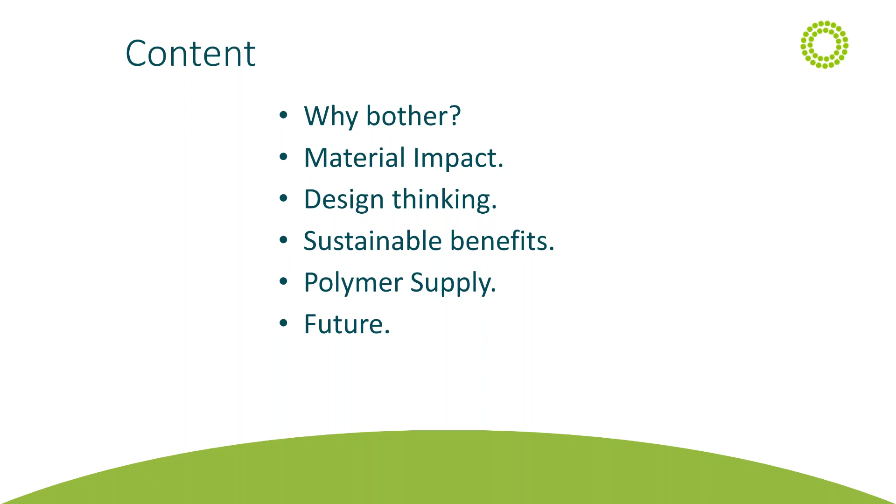Anyway, on to the presentation. First of all, I'll just reference why even bother with all this crazy recycling stuff? Why don't we just carry on doing what we've always done? Talk a bit about the impacts of materials and the way they influence design thinking, and then move on to what the benefits are for designers and specifiers of materials for using recycled content, and then a bit about where you might go and what you would need to look at if you're seeking polymer supply from the recycled marketplace, and then allow myself a few moments to do some future gazing.

First of all, I need to really reference what we do here at Axion Polymers. Today I'm speaking from our Manchester plant. So to set the context, it's really useful for me to explain a little bit about what we do, and then you'll understand where the basis of our knowledge and know-how has come from.

My company's vision is working towards a world where nothing goes to waste. Clearly that's a fair way off in the future, but on a simple commercial basis, if in my business there was nothing going out as waste and I could convert all the incoming materials into saleable products, I would have a much more valuable business.

My company, Axion Recycling Limited, has two sections to it: a consultancy business, which has been run since 2002, and also our Axion Polymers business, which is where we sort and separate materials. We've grown to, I think now we're about 97, 98 employees. So we've created high value jobs in the green economy. We're turning over a reasonable amount of cash, and we're making our contributions to the UK economy in wages and

employment, etc. At the moment, we can receive about 200,000 tons of input material, a material called auto shredder residue, which I'll talk about in more detail. Two plants here in Manchester. I'm sat in Trafford Park today, where we do the primary processing of metals and separating of the non-metallic materials. We have another plant in Salford where we then make finished polymer.

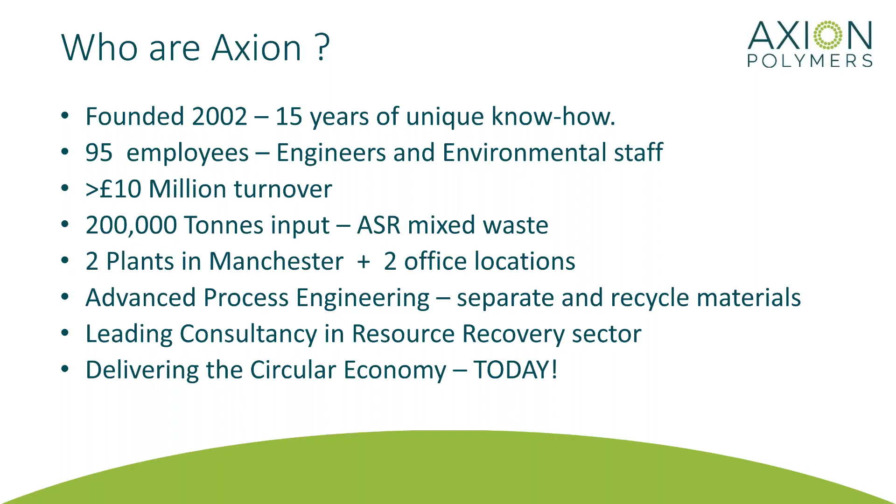And really, we're about advanced process engineering. We're chemical process engineers who just happen to see the waste in feed as our raw material. I think we're one of the leading consultants in the sector, and we're actually delivering the circular economy today. So I shall talk more about that.

This next slide is a familiar sight for anyone who spends time trying to drive around the UK, but all those motor cars in a traffic jam, I absolutely love it, because that's my future raw material stored in a metal box that's on 4 wheels on a big above ground warehouse that's being paid for by somebody else.

To give you a feel for what happens to motor vehicles when they reach end of life, this is a kind of model of the flow. The last owner, which is somebody who hasn't got a massive amount of cash, who ends up owning a 13-year-old vehicle, will normally ring up a local collection scheme.

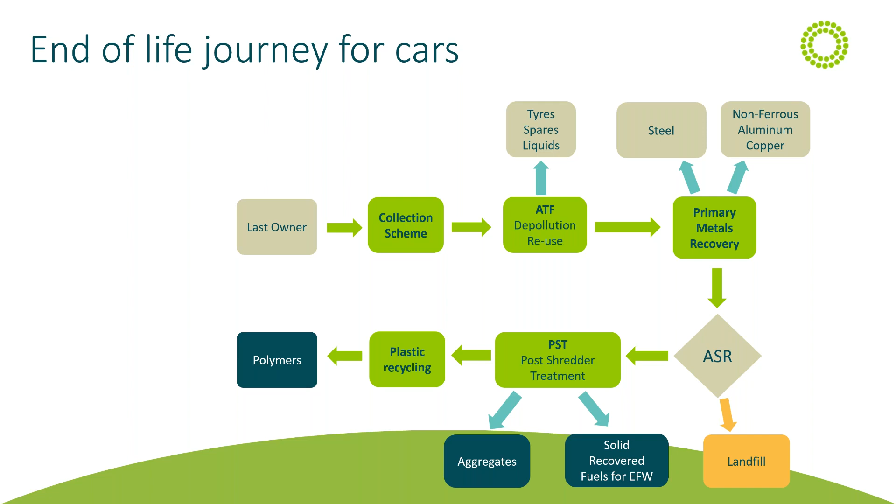We are linked closely with a company called Car Take Back, which does exactly what it says on the label. They'll come and take your car, give you some cash for whatever the weight is and the value of steel on that day, and they'll make sure that your name is removed from the logbook for the vehicle at DVLC Swansea. They depollute and remove liquids,

and then they pass the flattened vehicle onto a traditional metal recycler, who needs to be somebody who's got a big enough machine that can shred a whole car body up into little bits, and they'll get out the steel and the other big metals like aluminium. And that used to produce something called auto shredder residue, which traditionally went to landfill.

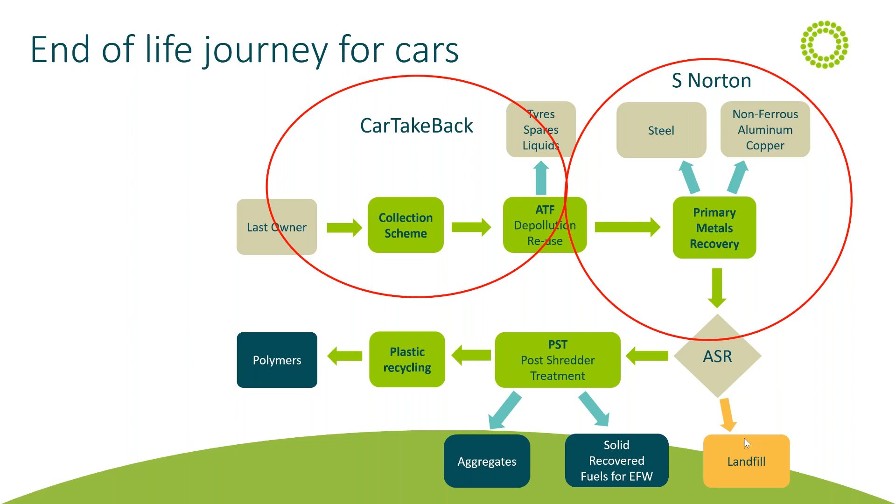But with landfill costs increasing dramatically like they have done in the last 10 years, everyone now is invested in PST, which is post-shredder treatment. And there the idea is to try and get anything out of this mixed non-metallic fraction that you can turn into useful stuff. So we get a stone and glass aggregate, solid recovered fuel, feedstock for our plastics recycling process,

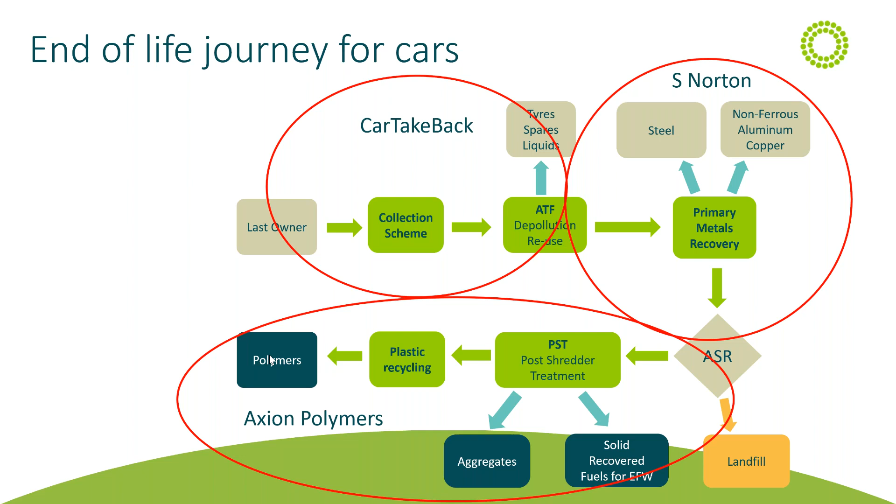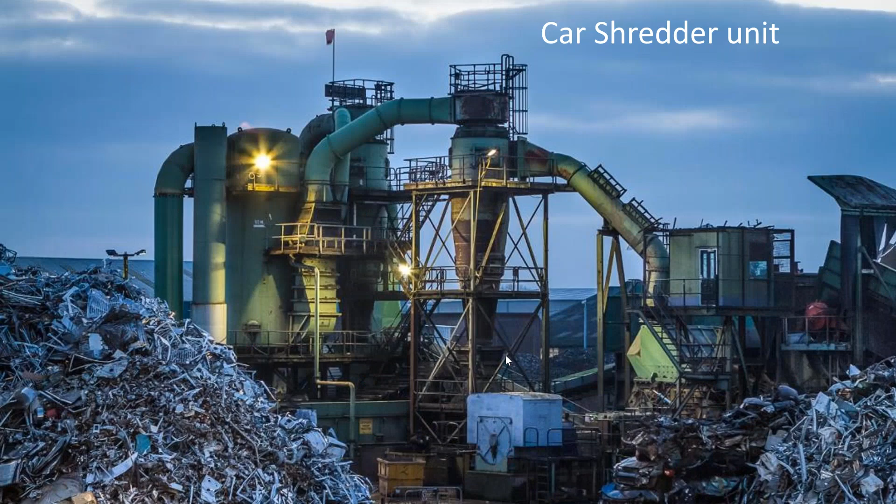This next slide shows a car shredding unit. The high stuff is a big air system that sucks away all the dust and dirt that's created when the shredding occurs down in the lower corner of the screen where the cars actually get shredded. There's a big drum magnet to pull off steel. There's a great big eddy current separator to pull off aluminium. And then everything else is auto shredder residue.

So ASR, as you can see by this next photo, is not a particularly attractive stuff, because if you think of all the things in a motor car which are not metallic, the seats, the carpets, the roof lining, the glass, the wood lining in the back of the door or under the boot, plus into a shredder lots of other things go in, like large domestic appliances, small mixed WEEE, generally collected scrap, building materials, etc. It makes shredder residue probably one of the most complicated mixed raw materials there is in the waste sector.

What's good about that is it's not that attractive to anybody else. So unless you spend a load of money and 15 years of your life learning how to sort and separate shredder residue, this stuff is really undesirable. So I don't have loads of people banging on my door every day saying, can we buy some of your shredder residue?

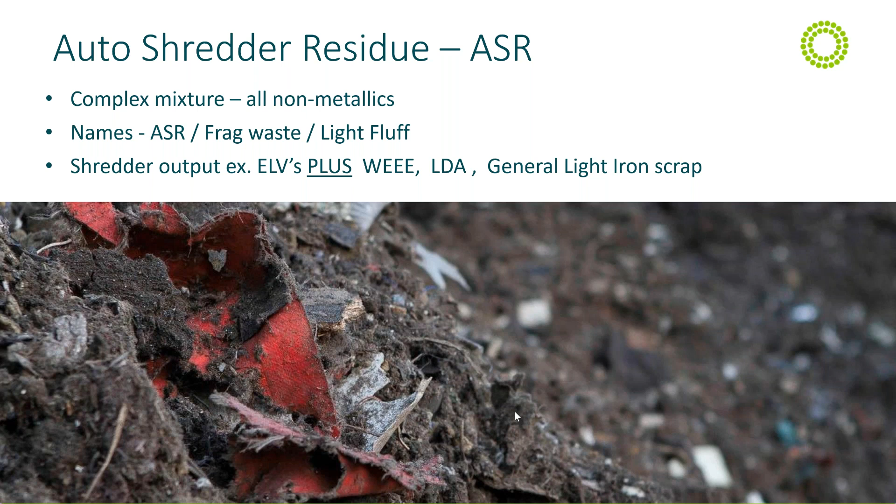The material gets fed into our SWAP plant, which is here in Trafford Park, Manchester, just about 50 metres from where I'm sitting in the office today. And that's the Shredder Waste Advanced Process Plant, which is the primary sorting and separation of that mixed ASR material. We built that in 2009, and we carry on improving and developing it as we go.

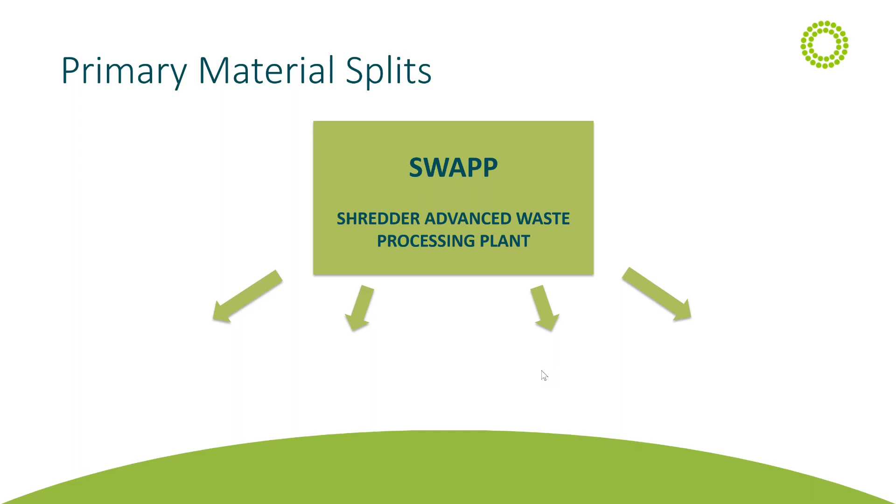And to make a complicated plant look very simple, here's the split of materials that we get. We get an alternative fuel, solid recovered fuel, which is the combustible fluffy fraction. We get aggregates and stone and glass for construction. We get copper, aluminium, a little bit of that out, and then a mixed plastics for upgrade.

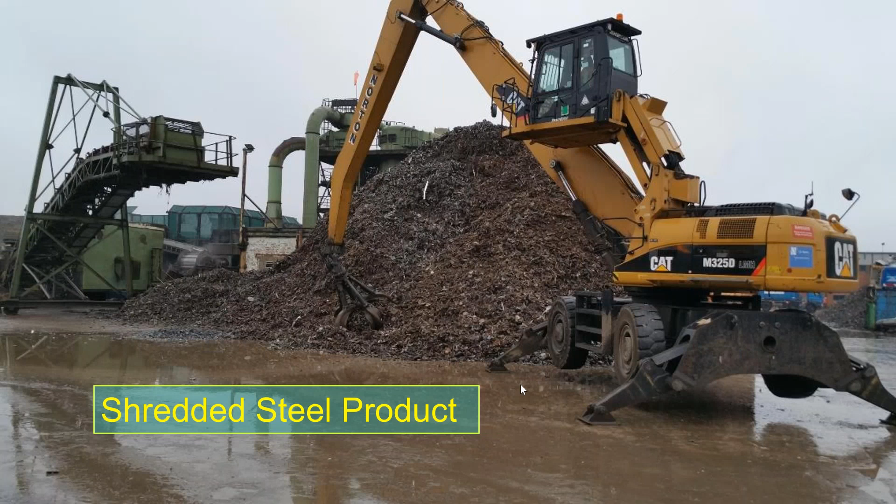Steel, you have to have a look at a picture of steel. I know it's not the prettiest picture in the world, but you have to remember that the steel is a large percentage of the infeed, and that was the original raison d'etre for the business. So the company I'm linked with, S. Norton, are big exporters of steel all over the world. They have docks in Liverpool where they can load 30,000 tons at a time. So steel is kind of the cash cow, big volume material.

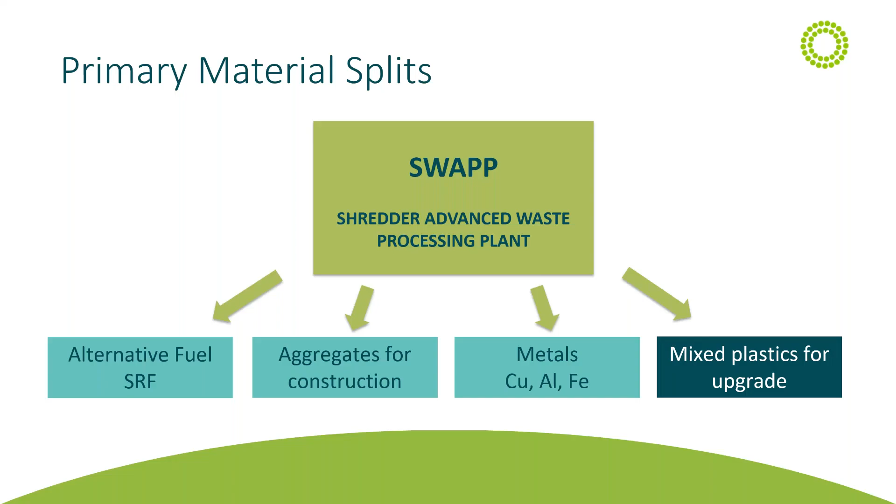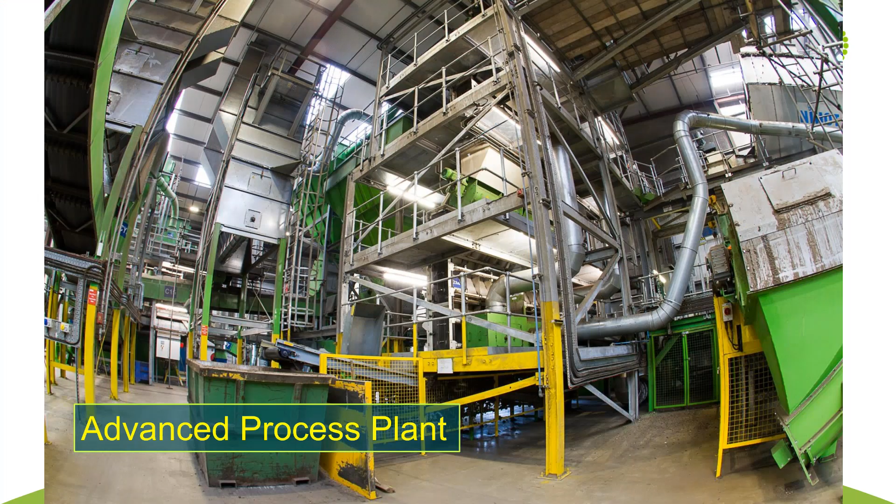And inside you can see the level of advanced process plant that we designed and built ourselves with our own engineers, because you simply can't go out and buy this stuff. It's all new, it's all leading edge, it's still pretty specialist. So designing it and building it, operating it and running it is what's given us the knowledge we've now got.

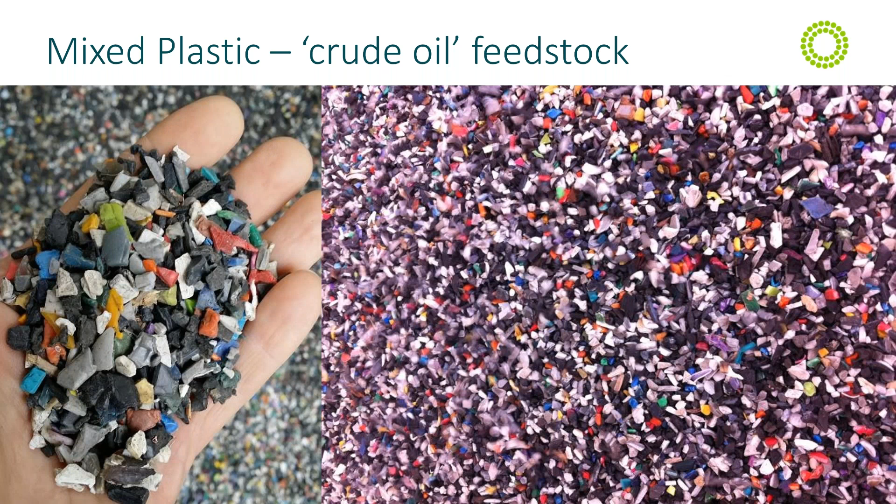We then get a lovely mixture of plastic that comes off the end of this SWAPP plant. And hopefully you're all amazed by the fact that this photograph is the material that we've extracted from that horrible looking ASR just 5 slides earlier. And in about half an hour, we've got what I would call an amazing transformation.

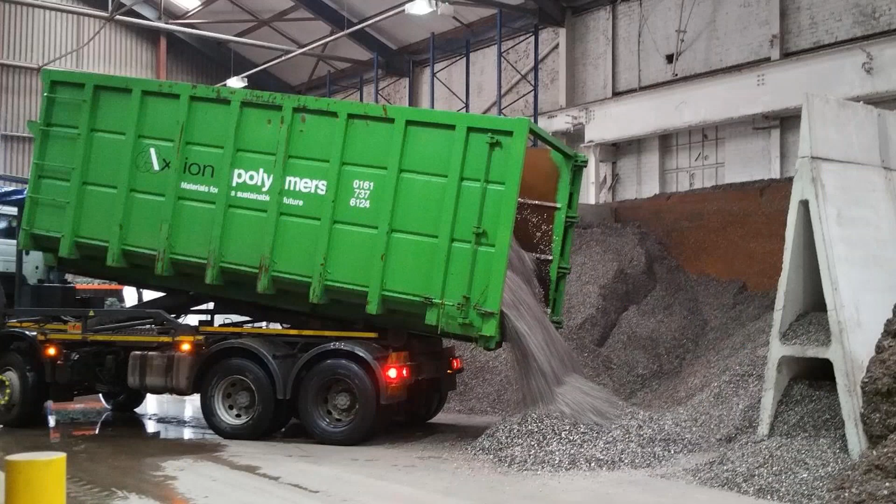This material is still all different types of plastic. You couldn't just stick that in an extruder, but as a kind of crude oil waiting to be further separated, it's really useful. And that gets delivered into our plant in Salford, which is only 5 miles away. And then that becomes their stable, steady, constant supply.

There's another 20 separation stages at Salford, which I can't explain to you because they're secret and it would take ages. But essentially, we use any basis for separation of the material that we can find: its size, its shape, its density, its color, its reaction to light, etc. And that lets us then get to a level of purity on the main polymers where we can make strand.

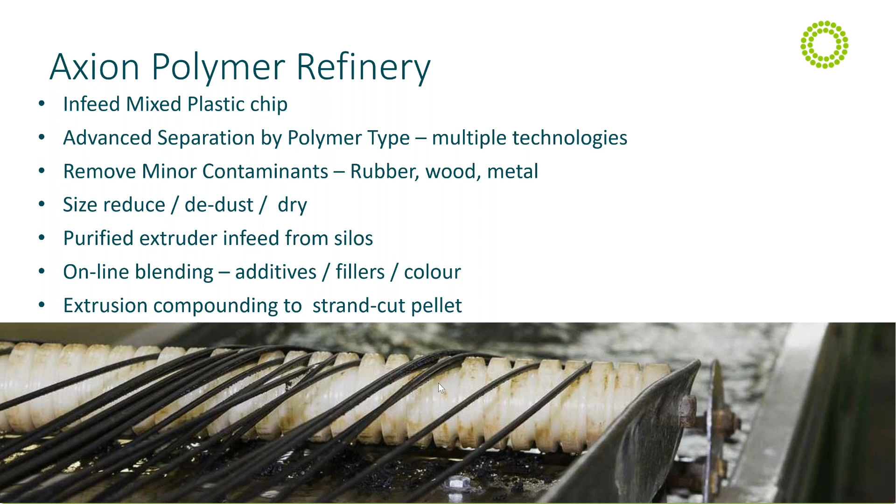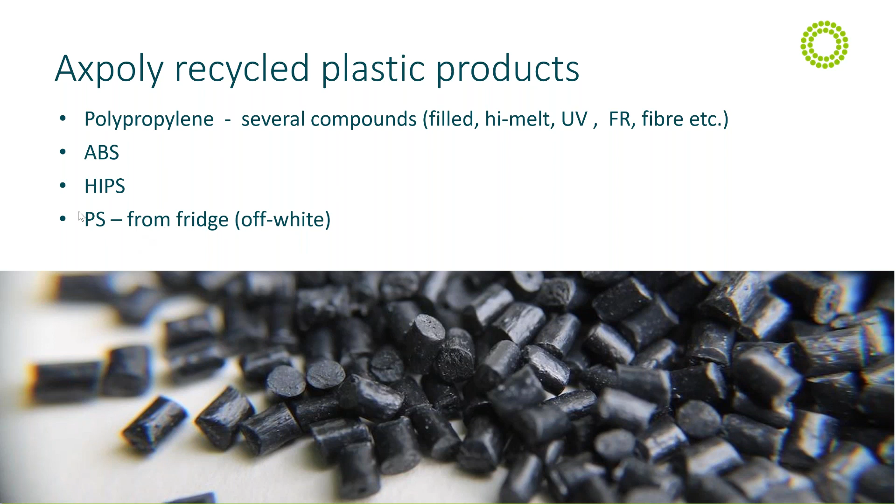Here's some strand being extruded, and then we chip that to pellet, and we're beginning to get near the end of waste. And we've then got polypropylene, ABS, and high impact polystyrene available. We still buy in some refrigerator flake. We don't have a fridge plant ourselves, and we make a light colored PS out of that. And then we've got a product.

So we can sell that to customers, and we're active in all these different markets. And as most of you will be familiar with the polymer market, you know that anything of any shape, any component, any product can nearly all be made out of plastic. So that's the background and the context about what we do.

But then I thought to myself, well, why bother? Why not just carry on using oil-based polymers that have come out of the ground and been refined by a big petrochem, and then they take those monomer gases, ethene, propene, butene, and turn them into polymers. That works. That's a big volume industry. And you don't have to be amazingly open-minded to realize that things are changing in the world.

One of the things I've developed as a habit is following the Arctic ice coverage in the north of the world, because the ice caps are a really important part of controlling the world's weather system. Normally the sun hits the ice and gets reflected, and there's a big lump of cold air that sits over the polar ice cap. To me, that sits there like a huge air conditioning system that tries to keep our world's weather pattern under some control, and the jet stream flows between the equator and bangs into the cold air of the ice cap and then moves up and down, and as we tilt towards the sun we get summer and winter.

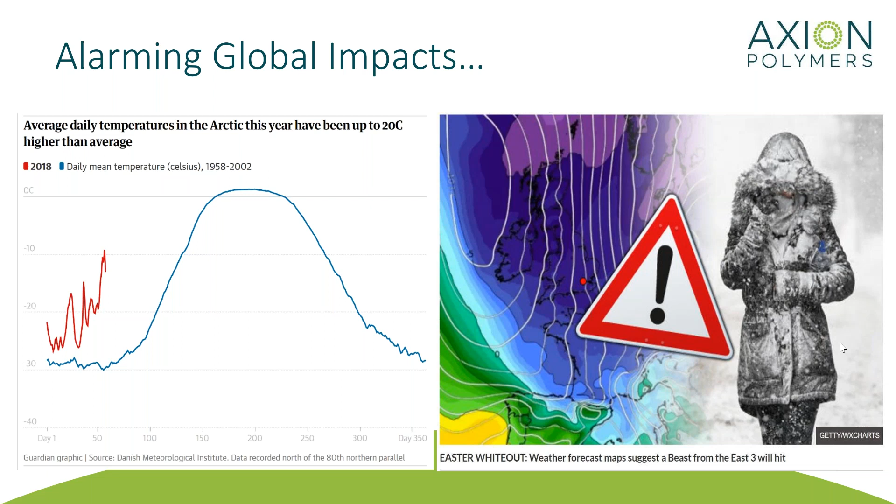What impact does that have? I took a photograph on the right, which is this beast from the east, a massive cold stream of air coming down, giving us unseasonal weather, and I'm told that at Easter we're going to have the same. So in terms of impact, burning fossil fuels and using fossil fuels to throw CO2 into the atmosphere is having a massive impact on everyone's lives.

And on the left, I've shown an example that I got from an academic meeting I went to at a university. And there's a kind of still probably theoretical world where raw materials flow into the circle and then they go round this lovely virtuous circle, and they either get turned into new products or redistributed, or we recycle all the materials. And you'll notice that on the left-hand diagram, there is no waste. We're a long way from that.

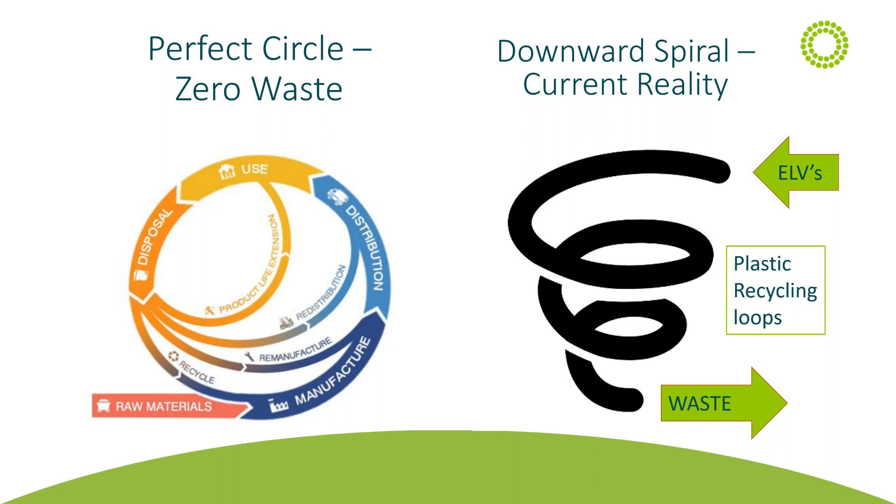I would accept that for metals, this is a much more closed up spiral where the material goes round and round and round. They're much closer to a non-waste model, but for plastics, we're still a long way from perfection. And I think the focus of this presentation and the ethos of my business is to try and accelerate a transition to a stage where we move more towards the theoretical future from where we are now.

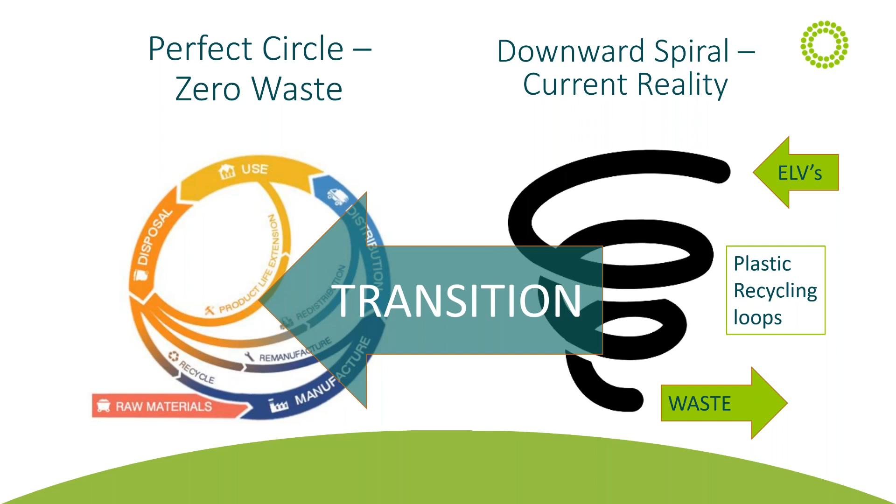We've shown that already, so I've doubled on my slides. Oh no, I'm going backwards, sorry. My mistake.

So, products, certainly automotive products, I'd call them materials hungry. You know, they weigh 1.3 tons on average. And the materials that go in products have a big impact. So, here's another example of my above ground warehouse. And we've really got millions and millions of motor vehicles, quite a lot of them pretty underutilized. They're either not going where they're supposed to be going at the speed they should, or they're blocking up the roads and the streets of our urban environment.

How much have we actually got of this stuff? You know, I tried to do some estimates here. The UK car pool, maybe 35 million vehicles. You've got to decide whether you include vans and coaches and lorries. Average weight, we know that's pretty accurate, about 1.3 tons. And the 250 kilo of plastics is all the polymers on a sort of modern compact vehicle.

And if you roll through the numbers on the lifetime, then there's a lot of debate about exactly how many cars arise as waste every year. I think it's about 1.7 million vehicles, even though the official destroyed figure is more like 1.1. And therefore, there's a massive amount of stuff sat in that big mine of vehicles waiting to be mined, and the annual arising is probably 450,000 tons of product. As plastic arisings, might be all mixed, might be complex.

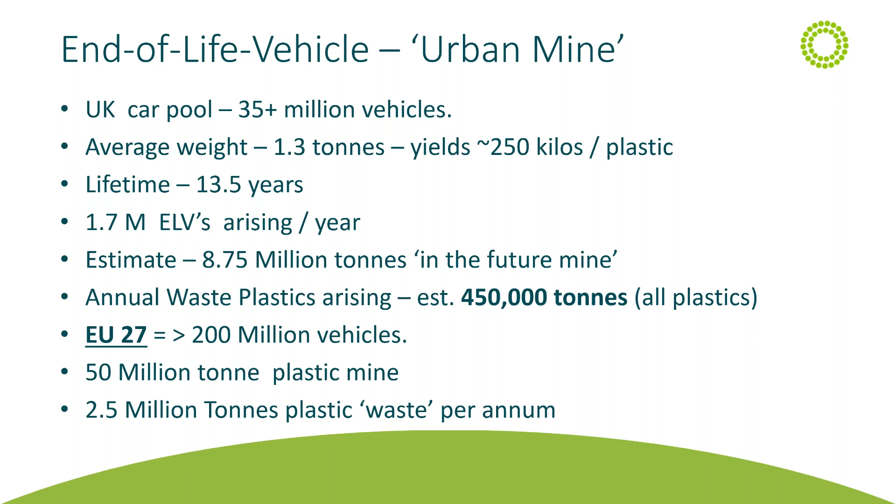Oh, sorry, I keep clicking my mouse the wrong way. Apologies.

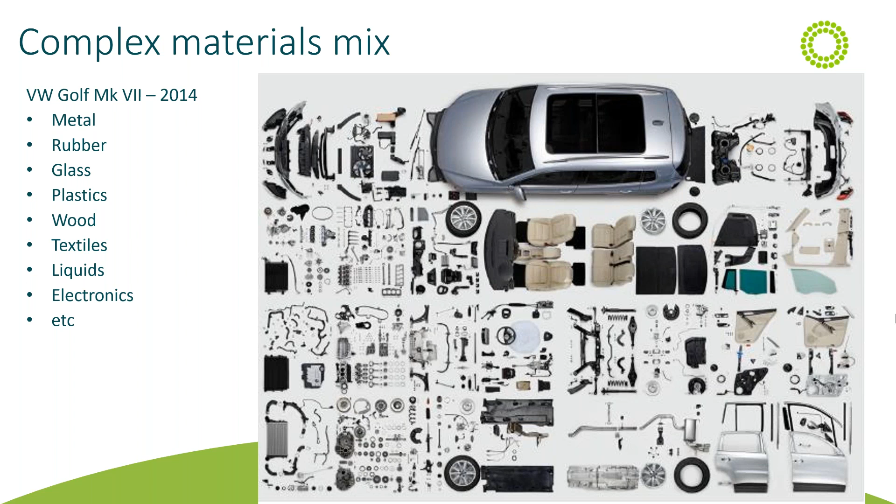It's complex. This is an explosion of all the parts. I can imagine the person who did this probably took all weekend in their garage and then laid all the parts out. It's pretty complex, but the mix of actual materials is very broad as well, and that's shown on the left: metals, rubber, glass, plastics, wood.

Putting that in a more ordered structure, about 70% of vehicles are metals, steel and aluminium, etc. And the plastics fraction is about 250 kilos. Depends what you call plastics, of course. If you roll in polyurethane foam, textiles, elastomers, and hard rigid plastics, then that includes the 250 kilos. But then there's all the composites and other complex things there. Even some of the glues and adhesives are probably elastomers.

And we have the thing in place called the ELV directive, which sets a high target for recycling and recovery of those materials. You can't hit that target if you just do the metals.

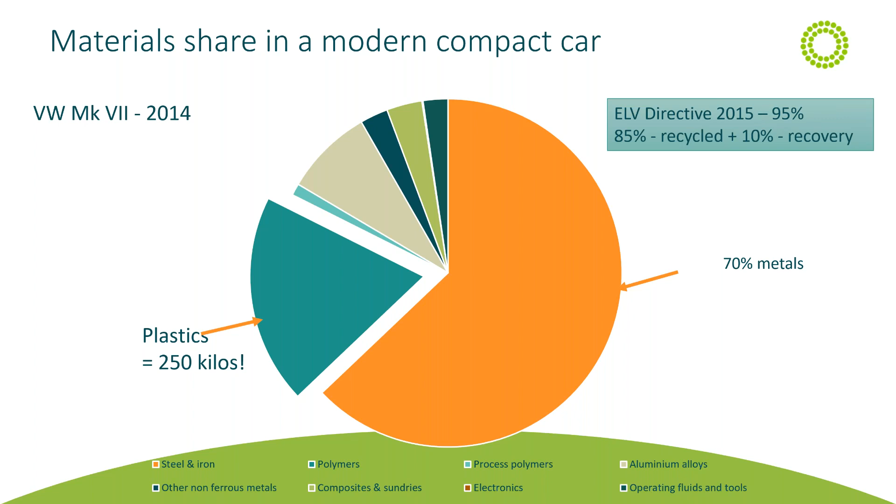But in the motor vehicle industry, times are changing. We will make a transition from internal combustion vehicles, which is shown on this example as the gasoline car, to electric vehicles in the next 5 or 10 years. And what this clever person in Holland did, the lady I've referred to down here, is looked at the life cycle impact of running an electric car versus a gasoline car.

Now, on the petrol car, all the focus is on the use phase because you're burning fossil fuels and emitting them out the exhaust. On the electric car, the big thing to consider is where did the electricity come from that you use to charge the vehicle? Now, there's two examples here. The top one shows what the mix of power generation was for Holland when this was done in about 2014. That will obviously become more renewable as they build more windmills, etc.

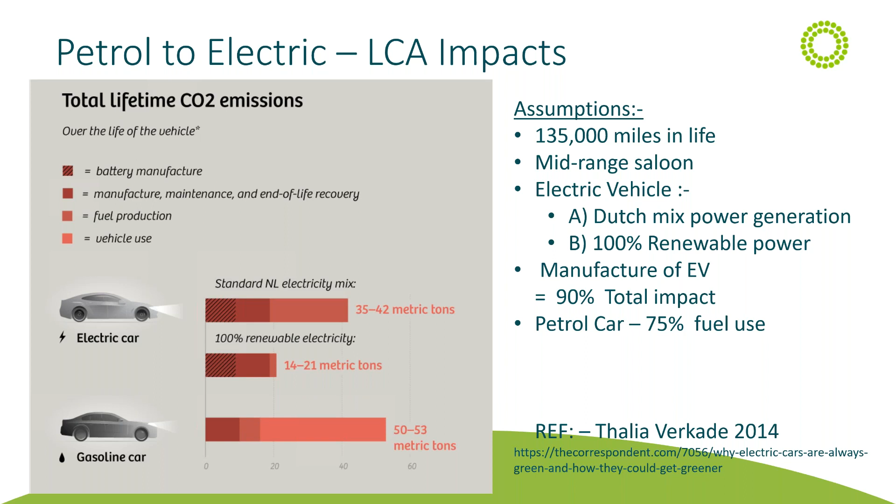But if you charge the car with 100% renewable power, then when you use that electricity, you're not really responsible for any emissions. So the only emission from driving an electric car charged with renewable power would be a little bit of rubber crumb off the tires, maybe. And at that point, the choice of materials and the manufacturing and putting those together is the entire impact of the car on the environment until, of course, it reaches end of life.

So what that means is the correct choice of material really, really matters, and that the duty and responsibility on people building cars is switching from the current main ethos, which is how can we get weight down and reduce emissions of fuel, over to what is the impact of the materials that I've chosen and how am I going to put them together so that when that product reaches end of life, I can get those materials back. If they're charged up with renewable energy, that part of it's done.

So what are the various impacts of the choices the designer makes when they want to build their lovely new shiny model that's going to sell loads? A new electric version of something like maybe the Nissan Leaf or the Volkswagen Golf. That's the big volume area. Certainly, I think it's clear that the decisions made at the design stage really live with the product for the whole of its life. So lightness, efficiency, the way you fit those together to make a really slippery shape, that has a huge impact on the life cycle impact of the product.

And when you select each material, you need to really think about the embedded carbon cost that came with that. I know that in the last few years, aluminium has been replacing steel to a large extent to get vehicle weights down, particularly on larger saloons. But the problem is you maybe get the weight down and make some savings on the in-use fuel emissions, but you bring with the aluminium, I think, about 10 times the carbon impact of buying steel, and steel is largely recycled. So there's a much more difficult quantified balance to be made when making those choices. And I really don't think that much of the design industry has switched onto this idea yet.

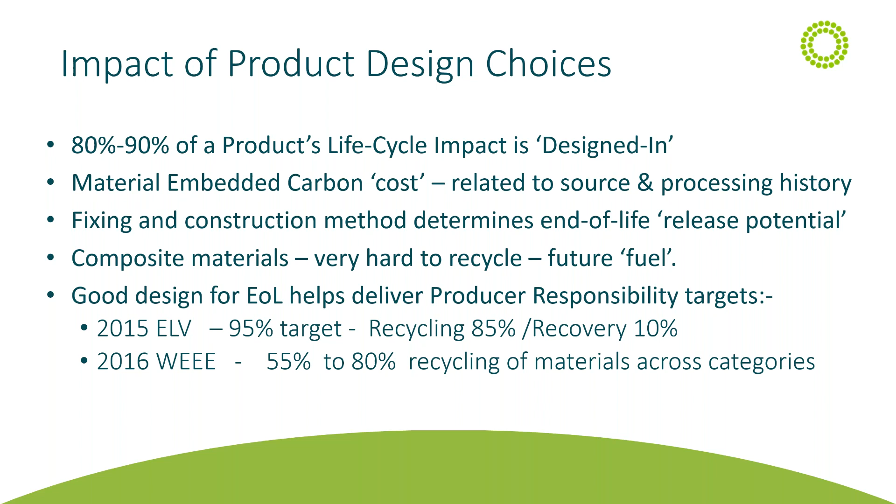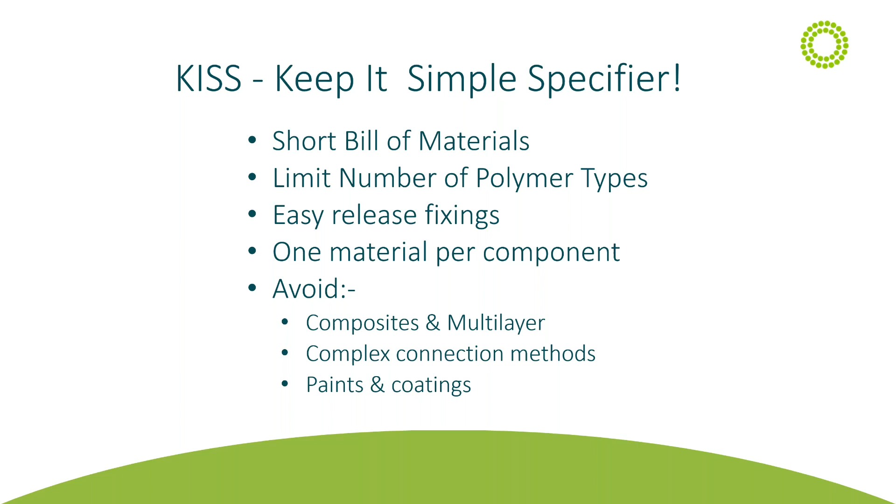but I can accept that there's loads of other things that influence the design, and I'm not saying we should all be driving around in this type of vehicle, but maybe when we don't own vehicles and we just dial up a 4-person pod to take me to the swimming pool with 2 children and family, I won't be so bothered about the aesthetic design of it. I just want the functional service performance, and then maybe the design criteria and rules will change.

So, what are the benefits of using these sustainable polymer materials? Because it's all well and good for me to come up with, let's make a transition to the circular economy, let's save the planet. You have to offer products which can compete with what's already out there.

And for me, some of the benefits are that nearly every leader of a well-known branded organization, particularly if they're making cars or washing machines or those material-hungry sectors, has stood up and said, not only are we going to be brand leader, not only are we going to deliver fantastic products, we are going to care for the planet, and we're going to be doing it in a sustainable way, and we're going to look at how green we can do this. And that goes in the annual company report.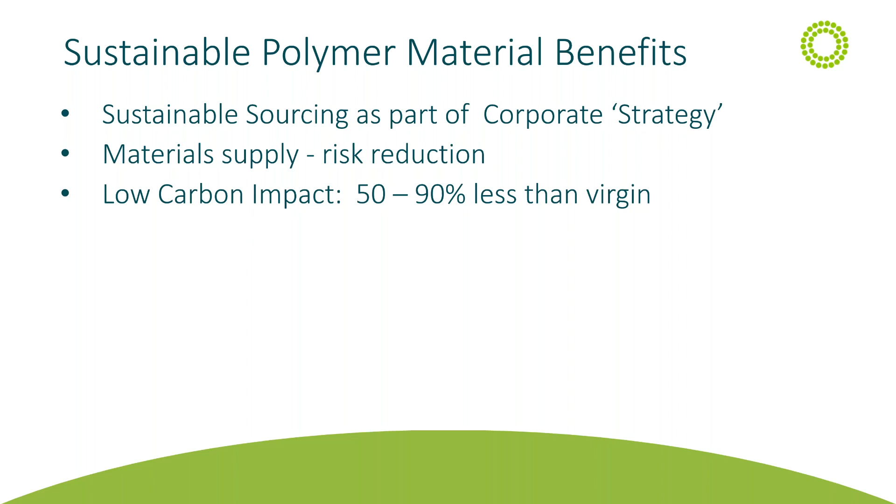Clearly, carbon impact is massive here, and I'll talk a bit more about that later, because that will become a metric in terms of judging materials in products. Cost savings, absolutely crucial, and very often we can give quite significant savings on recycled material versus virgin polymers.

Being insulated from oil price volatility is a difficult one to sell to people, because many purchasers are absolutely locked into the idea that all their polymer parts will move up and down in value following maybe Platts or ICIS. They fully expect you to ring them up in 6 months and say, oh, now that piece of 1 kilogram plastic has gone up by 50% because of force majeure at the polypropylene plant in Germany.

Well, if you own the whole waste capture and supply chain, you're completely isolated from all that horrible volatility and Platts and ICIS stuff, and I can just offer a customer a fixed price for the duration of the order that they give me.

I think as consumers become more interested in the impact of the products they buy, they're starting to ask more difficult questions. The educated, knowledgeable consumer thinks really hard about what it is that's embodied in the product they're buying. I spoke with a company the other day who started selling storage boxes on an internet site, and they noticed that on the internet, the customer takes a little bit more time because they maybe have to compare offer A and type B and C.

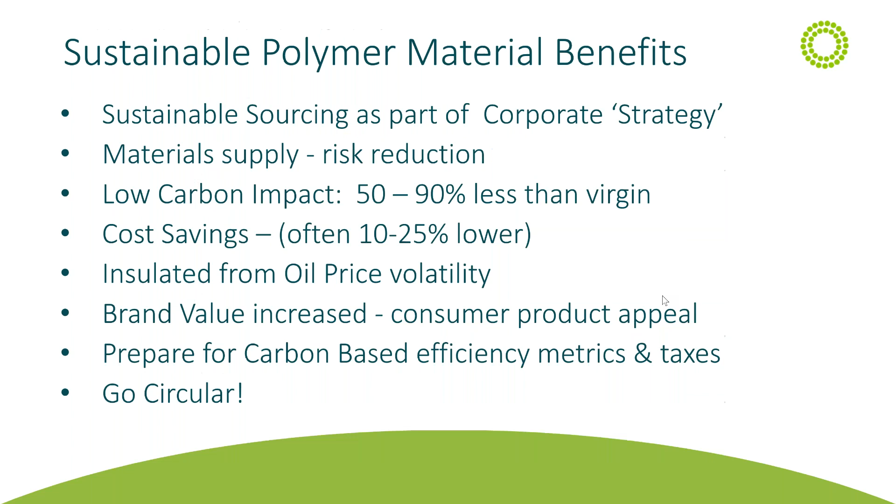kilogram produced. ABS has a much higher figure because you have to make 3 polymers, acrylonitrile, butadiene, styrene, and combine them together in a much more energy intensive reaction. So that gets a really high impact figure, and HIPS somewhere in the middle. And then these are the savings.

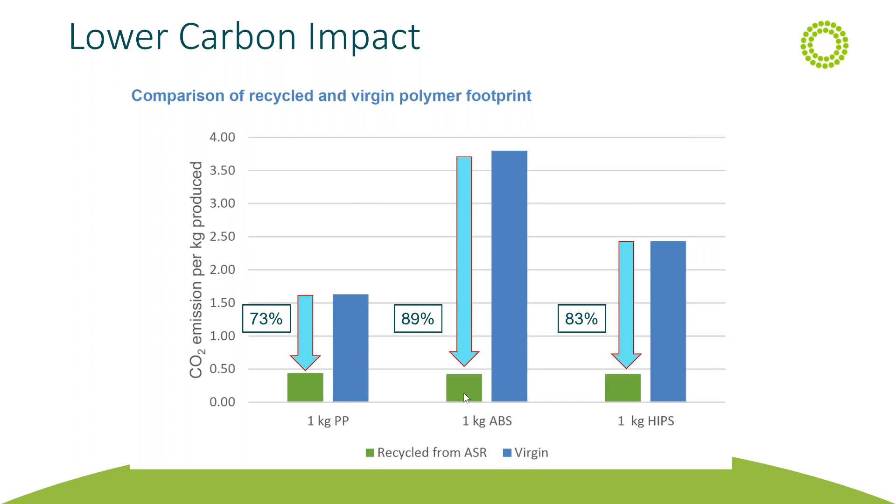They're absolutely vast. My green bars, which are done by the Carbon Trust system for analysing the system under my control on a like-for-like basis, the polymers are about the same because they're all mechanically recycled. So for ABS, the saving is absolutely huge, maybe 3.3, 3.4 tons of carbon emissions per ton of material. What does all that mean? Because I know that nobody walks around knowing what a CO2 equivalent is. So I've worked this through to this example.

Let's assume this lorry came last week and delivered 20 tons of virgin ABS polymer into my injection molding plant. And then I went in and I convinced the purchase manager to switch from his virgin ABS and go and buy some lovely Axpoly low carbon ABS. Delivering 20 tons yields a saving of 20 times the 3.4 kilograms of CO2. Great big number. Still doesn't mean much.

If the lorry then drove away from the factory and said, right, I'm going to keep driving this lorry, I'm going to count up the emissions impact of driving the lorry, because lorries do 8 miles per gallon of diesel. We can work out exactly how far the lorry will go if it used up all the savings that were achieved from just one 20-ton delivery. I'm putting a pause in so that you can all have a guess. And if you were in the audience now, I'd be asking people to guess.

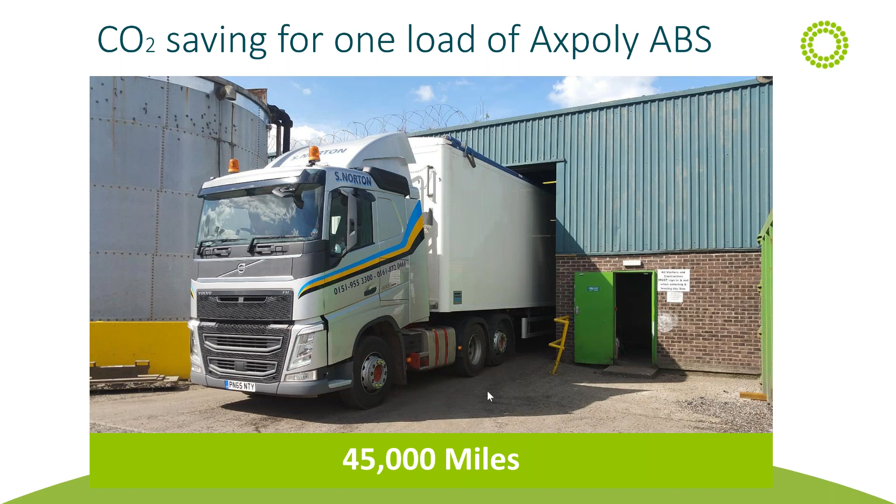But 45,000 miles, it's absolutely vast. That's what, 6 to 9 months operational time for one big road vehicle. So when these slightly ethereal CO2 equivalents get converted into pound note figures, the savings will be huge.

Right, nearly into the time. Last few slides. What should you look for if you're trying to select someone to give you some recycled material? If you're absolutely convinced that the massive amount of benefits are a convincing thing, where do you go? What should you look for? Because you're moving into a new field here. You're not going to super multinational oil and petrochemical businesses who've got huge, great plants all over the world. You're probably dealing with a smaller, local, entrepreneurial recycler type person.

So I would say that the things to really look for: where does the person get their feedstock? Is there some really reliable long-term urban mine that they're tapped into? If they're scrabbling around every week to buy a little bit of scrap from the nearest injection molding company, then I would steer miles away from that, because anyone who works as a parasite on industrial scrap is destined to disaster. Make sure that there's some sort of really integrated business model, that there's a degree of control and ownership all the way along the waste chain, from the origin of the waste and all the way through the material stewardship to start producing useful products. That will show a long-term investment, a secure supply. I call it going from the grave back to the cradle.

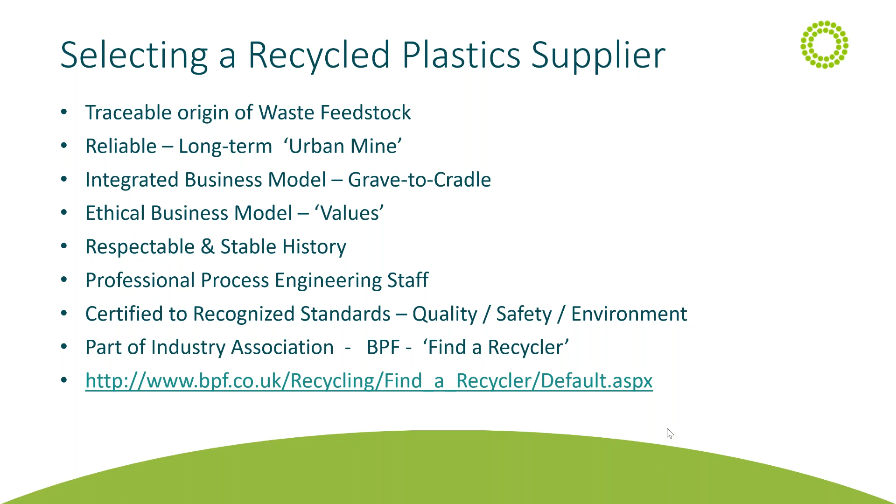We're nearly done. If I was in the audience, if you're there in the audience now, I'd be looking around the audience to see if anyone was nodding off a bit, and I might raise my voice, but as I can't do that, I'll assume that everyone is still wide awake, fully engaged with my talk.

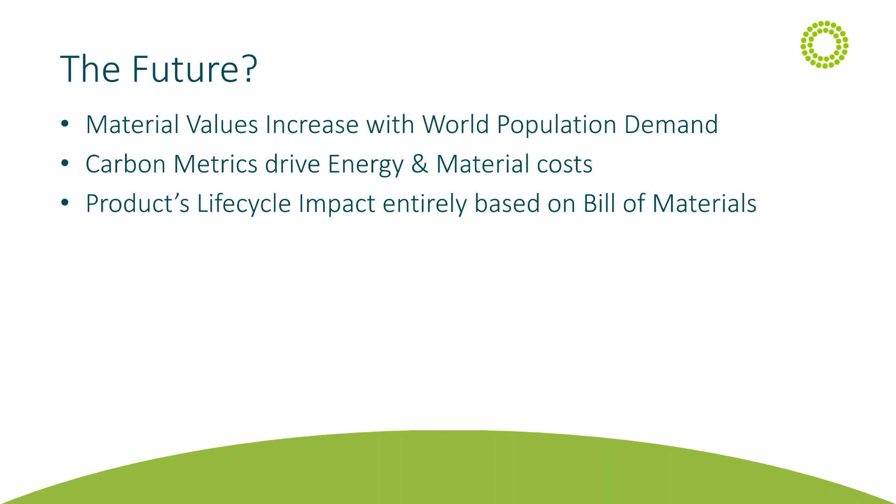I believe that some countries will begin to understand the importance of carbon metrics to drive both their waste recycling sector and also to measure and control the costs and choices made when energy and material hungry industries use up materials. And when that happens, when carbon equals pound notes, we will see some huge changes. We will get to a point where product life cycles, as I pointed out with my electric vehicle charged entirely on renewable electricity, are entirely based on the bill of materials and the choices at the design stage. I think we'll start to see better designed products, which are not just about aesthetics and sales and glossiness and techno-ness and, oh, isn't it appealing, isn't it lovely, isn't it pretty? Materials that actually really think about how they're going to be yielded and extracted at the end of life.

I think we'll see more business models where organizations who own the materials when they built the product will want to own that material when it becomes available at end of life. It's already happening in things like motive power batteries for cars, where there's loads of cadmium, lithium, lead in the battery, and they're really expensive. It makes sense for the owners of those materials to get those big lumps of valuable materials back. And we'll see that business model come in a lot more.

I think we'll start to see integration between manufacturers and the recycling sector. And we've already seen that in some areas where manufacturing businesses have taken over recyclers to gain the know-how, the knowledge, that kind of entrepreneurial zeal that makes them do really amazing things. And then, of course, that will start to drive the design itself. If manufacturers had to take apart the products they'd made a few years before, they would think a lot more

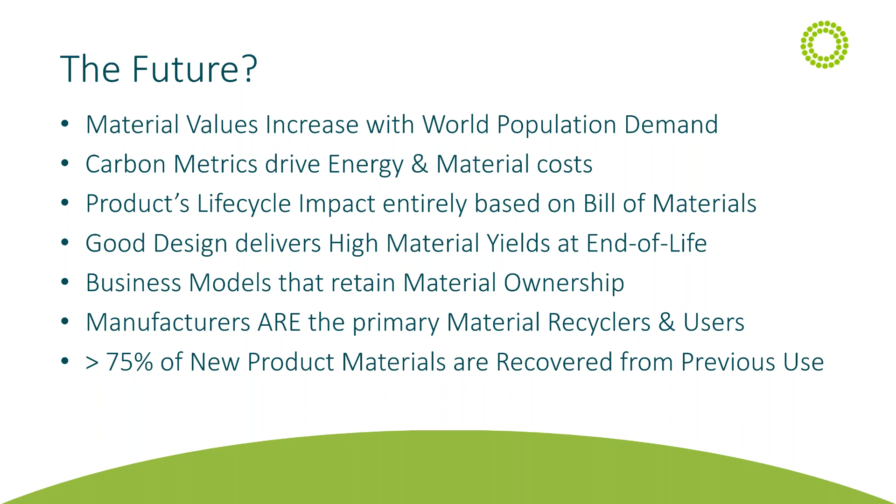about the design. I think we could certainly get to an area where 75% of new product materials are made from recovered previous use materials and avoid our dependence on digging things out of the ground and drilling them out of wells. And also, I think that these new business models will really reinforce the relationship between users of products, which are usually delivering a service like transportation, clothes washing, whatever, and that service provision from a brand you trust and a brand that's ethical, cares about the world, cares about materials will be strong.